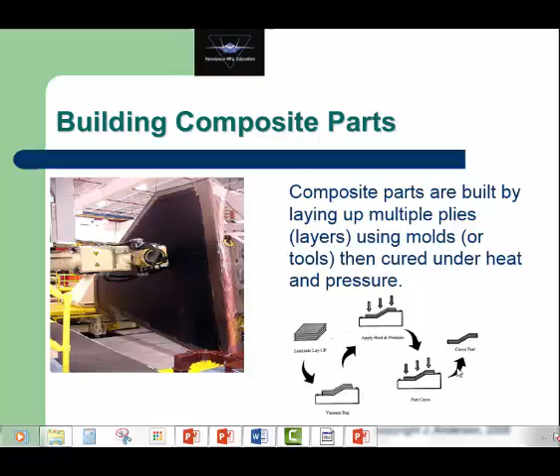So in some way we need to combine the fibers with the matrix, or actually put the matrix onto the fibers. And there are several ways that we could do this. First of all, we have to arrange the fibers, so usually we take a fabric and we cut it in the shape that we want, and we put it into a mold.

Now this mold that's shown here is a female mold. That is, the walls of the mold will define the exterior of the part itself. So the walls of the mold also define our surface quality. We'll lay the sheets of fiber or cloth into our mold, and then we'll somehow get the resin onto the fibers.

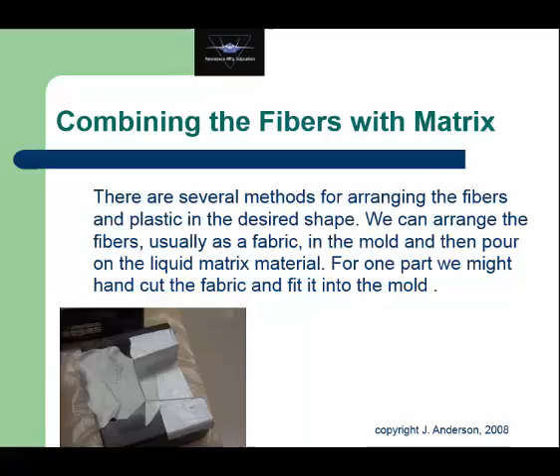So the first step in all this is to get our plies, or our layers of woven material, woven fibers, into the proper shape, the geometry that we need to fit in our mold. So if you're making one part, you could probably just hand cut the fabric, trim it so that it fits the mold well, and it's all good.

But if you're doing multiple parts, you want to conserve the material as much as possible. That is, you're making 100 parts, and so the material wastage becomes a factor there. You want to do something different.

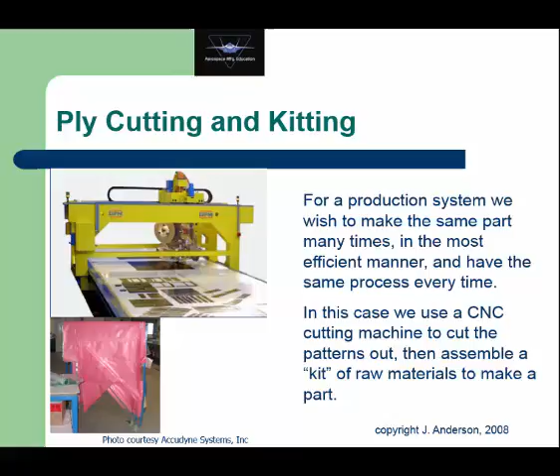One of the common ways that's done is with a CNC cutting machine. So we'll lay out a pattern on the CNC cutting machine, the computer numerical control cutting machine, that's the most efficient pattern that we can cut out of this width and length of cloth that we have. And then the machine automatically cuts that. Interestingly enough, this machine is also used in the garment industry to cut out patterns of cloth to make garments.

So the wet layup: basically, the wet layup process is we lay the fabric in the mold, we saturate the fabric with a mixed liquid resin. Most of these thermoset resins are two-part resins. That is, we mix two chemicals together, and that starts the chemical reaction. So once we mix them, we have an open time for the resin, because the reaction has already started. Over a period of time, this resin, the mixed two-part, will start to thicken and eventually harden.

So our challenge here is to mix the two parts of the resin and quickly go and saturate the fabric when we have a low viscosity liquid that will get into the pores in the fabric more easily, or wet out the fabric, as the terminology is.

So we work the resin into the fabric so that it conforms to the mold. We add another layer, another ply of fabric, and we repeat the process with the resin, and we continue until all the plies are in place, and we work the excess resin mechanically out to the edges, and the composite conforms to the mold. Right now I want to show you a video of actually this wetting out process.

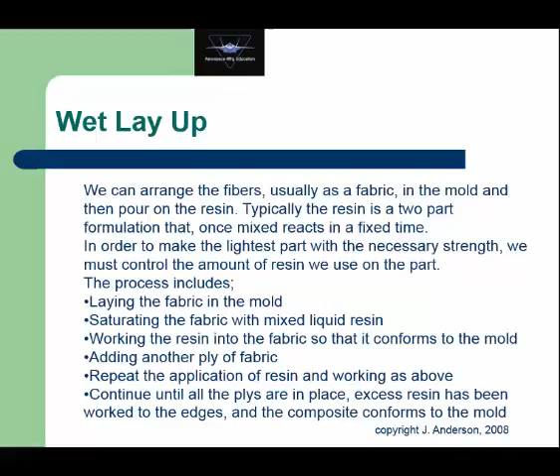It's about a 5-minute video, so let me turn that on. We'll take some of the fabrics and we'll just wet them out with epoxy, get a feel for the different fabric types, the difference between Kevlar, glass, and carbon, and we'll try to get a feel for how the different weave styles affect how well they wet out with epoxy.

And what we have is carbon uni, we've got some Kevlar woven and some glass woven, and some 1708 knitted glass, and some 1.5 ounce chop strand mat. So we'll do those, and then we'll wet out.

And this example here is a stack of 4 plies of each of those products, and then we're going to put a peel ply, which is the blue material, on top of those. Just squeegee out the fabric and put the peel ply on top, and try to consolidate just by hand, no vacuum pressure, but just by hand.

Consolidate the laminate, get all the air out, make a nice solid laminate of these fabrics. Part of the key to that is just to get a good wet kind of edge with the brush, ahead of the brush stroke there.

Really what you're trying to do with the brush is push the resin into the bundles. So you've got resin coming up and you've got resin going down. So I think the thing to notice here is that the cloth really wets out fast with epoxy. It's just, cloth and epoxy are made for each other.

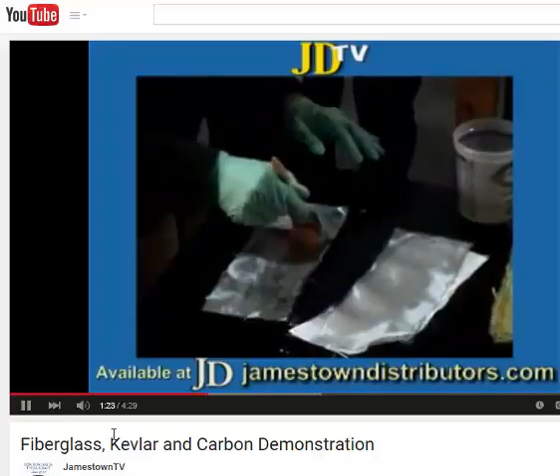And you know, you can see that this epoxy is cold, it's thick, which is really not the best situation, but even so, it just wets out beautifully. You can also see that the cloth is really hard to keep in line. It's a cloth, so it's woven, it's not stitched, it's not mechanically attached together.

It's just held together by the weave itself. And then when we're done with that last layer, we're just going to put a layer of the nylon peel ply. That's the blue material. That's just going to give us a nice, smooth surface on the top.

And whatever finish you have on the top of the peel ply, you will get on the top of the laminate. So it does, if you're concerned about that, it does benefit you to take some time just to squeegee out those little wrinkles. Will some of the amine blush go away? Yes.

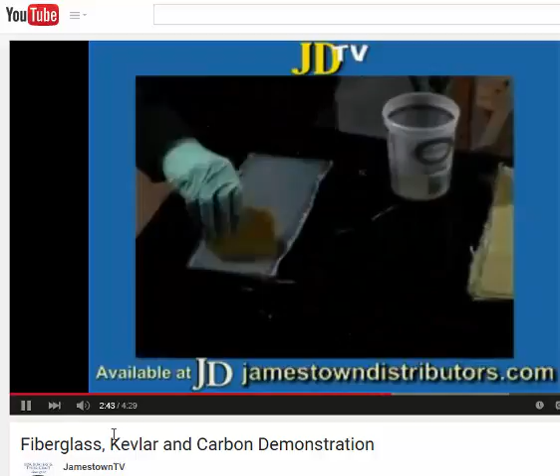Yes, there's a difference between wetting out glass and wetting out Kevlar. It's just harder, it's a lot more difficult to feel comfortable doing a good job. And that won't mechanically stand up when you get done, even with a peel ply.

It's a disaster, but you can peel that back and you can see that the combination of having the substrate, the table pre-wet, and ensuring that you've got a lot of resin there, that's how I feel comfortable knowing that you've got Kevlar properly wet out. Obviously, there's more resin than you need, but I'd rather be on the safe side with Kevlar.

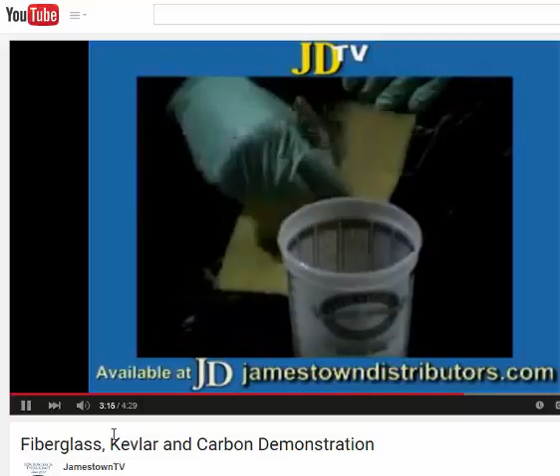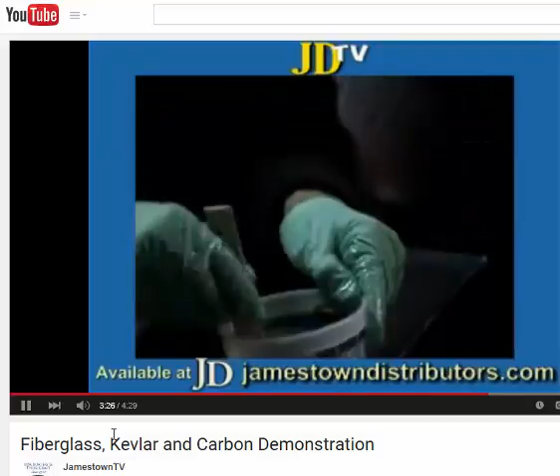This is actually an infusion resin that we have in the shop. It's very, very thin, as you can see, but it's a vinyl ester blend, infusion resin. It's a very nice resin.

Now, what we could do maybe at the same time is just take the epoxy and do this exact same thing I'm doing with the mat. Just wet that out and then do it side by side.

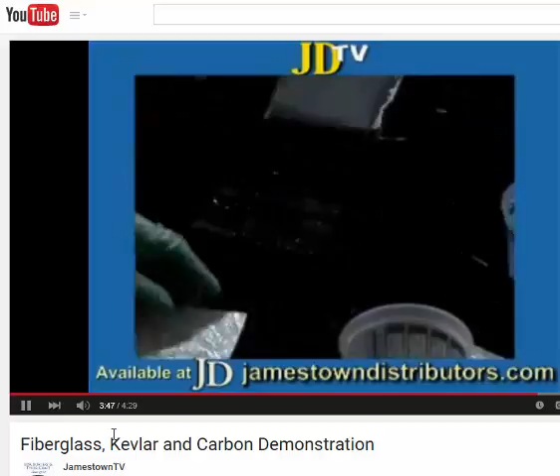You can see how the mat just really disappears with styrene-based resins. I mean, it's just really, really clear. The binder that's holding the mat together is designed to dissolve in styrene. And the problem is, or the good news is, that epoxy has no styrene in it.

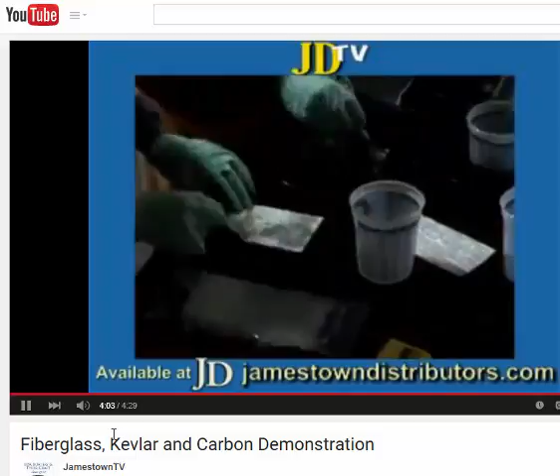So we put that on here, we're doing these side by side, and you'll really see how one just wets right out, and the other one doesn't. See, it looks like it's dry, but it's not. There's plenty of resin, it's just not breaking down the binder. Anyway, that's pretty much it, I think.

Typically, a male mold would be something that you lay up the fabric around, and then the interior of the part, the composite part, has the finished surface on it.

Wet layup is probably the simplest methodology, but the problem is you get a lot of wastage, and it's very hard to control how much resin you have in your finished product. For the highest performance parts, we'd like to have the minimum amount of matrix material necessary to hold the fibers in place. The resin has a much lower strength than the fiber, so we want most of the weight of our part to be fibers and a minimal amount of resin to hold it in place.

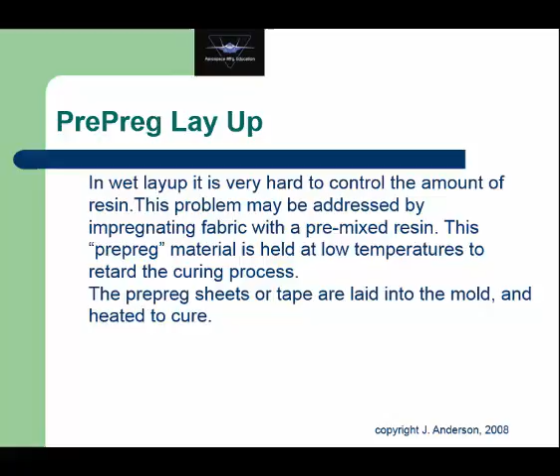So the next step in the process, once we get the fabric and resin into the mold, is to debulk or consolidate the part. I mentioned a vacuum bag before in the overall process—this is the vacuum bagging process.

On top of that, we have a porous release paper, which gives us a surface to press down on the part and also allows gases and resin to escape because of the porosity. Then we have a breather material, more porous, allowing gases and resin to escape. Then a barrier release, which is a seal, followed by a bleeder material that allows us to get rid of excess resin, and finally the vacuum bag itself.

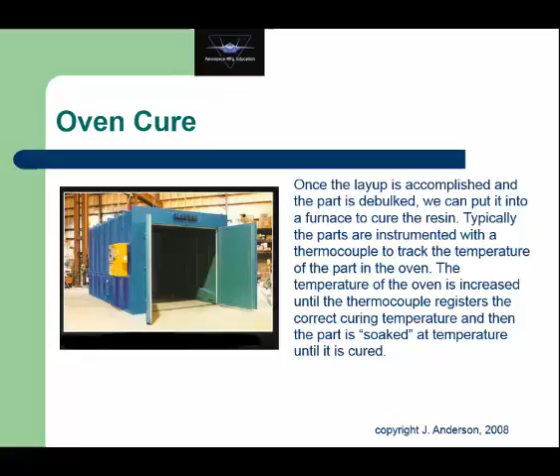So what's the next step up? Well, if we want really high performance parts, we need to be sure we've consolidated the parts well, then we need to go to an autoclave.

The autoclave is essentially a pressure vessel. It's been described as a big pipe bomb. We can increase pressure, say to 200 psi on the inside of this thing.

We have a vacuum bag also, so the vacuum bag pulls some pressure on the outside of the part, pushing it into the mold. Then we have an external positive pressure on top of the vacuum bag that increases the force pushing the fabric into the mold, pushing out any air or gas bubbles and excess resin.

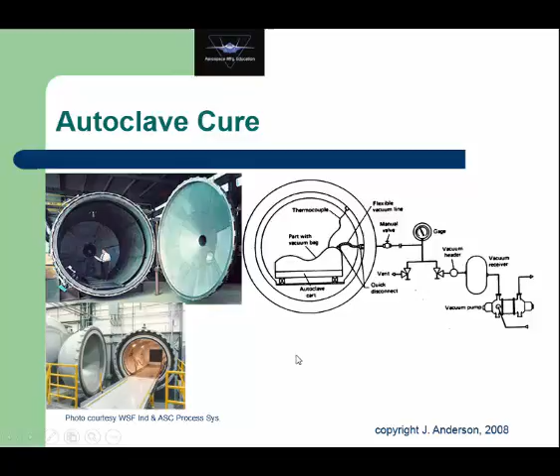This is an overall schematic of the plumbing in the autoclave. The smaller autoclave at the bottom is at the Cessna plant in Wichita, Kansas. This larger one is also in Wichita, but it was designed and manufactured specifically for making parts for the Boeing 787 fuselage, big parts.

This is a typical autoclave cycle. You can see we bring the temperature up in steps so we can get it up to, in this case, 350 degrees. It's fairly typical for an autoclave part. We also bring the pressure up, and here the external pressure is about 100 psi. This is the time cycle.

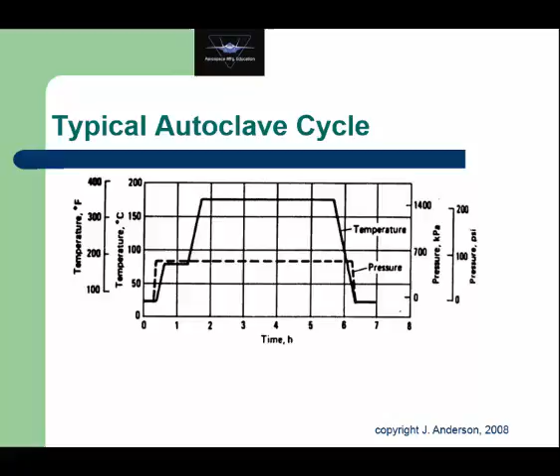It has to sit in the autoclave to cure. So you can see that when we make the part, we invest all this time and labor putting the part together, and then we spend 8 hours in the autoclave before we know if we've got a good part. So it's important that you control the process in making composite parts at every stage, because you're adding a lot of cost into the part as you go along.

This is a little different take, a spin-off on wet layup called the vacuum resin infusion process, and it's becoming very popular. The reason is it allows you some of the advantages of pre-preg without the expense and hassle of having to buy pre-impregnated materials and store them under refrigeration.

This allows you to lay the fibers, cloth or mat, into a mold, set up your vacuum bag, and instead of just pulling a vacuum to press the part into the mold, your vacuum bag also gives you a vehicle to pull resin. You have a resin reservoir and a hose going in from one side of your part, and on the other side a vacuum hose that goes out to a vacuum pump.

As you start pulling a vacuum, you pull this vacuum bag down onto the part, pressing it into the mold, and at the same time we suck resin up through the fabric underneath the vacuum bag and out the other side. So this is becoming popular with aerospace manufacturers because it cuts out some of the hassle involved in using a pre-preg.

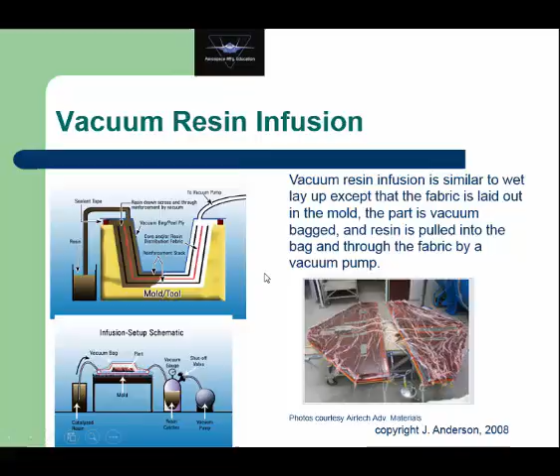Much like a tape dispenser for packaging tape, most everybody's seen those, where you have a roll and you pull it along and it lays the tape down. Well, this is an automated, more highly controlled version of that.

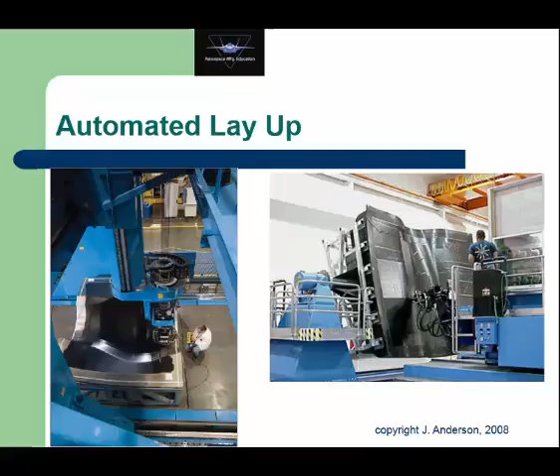So this is tow placement as opposed to tape placement. With tow placement, we typically have a mandrel, a male mold, tied into a device similar to a lathe so that it rotates the mandrel, and we lay the tow across the top of it. Remember, a tow is maybe 1,000 strands twisted together of carbon fiber. As we rotate the mandrel, we can move the orientation of our dispensing head and get a different angle of the fiber with respect to the long axis of the mandrel.

How do you keep the fiber in place when you lay it down? Well, the fiber, or the tow, is typically wetted with a small amount of resin that makes it tacky and holds it together. Once the part is made, you bag it all up and use vacuum infusion, wet layup, or whatever method to get the remainder of the resin in, then go through the curing process as we talked before.

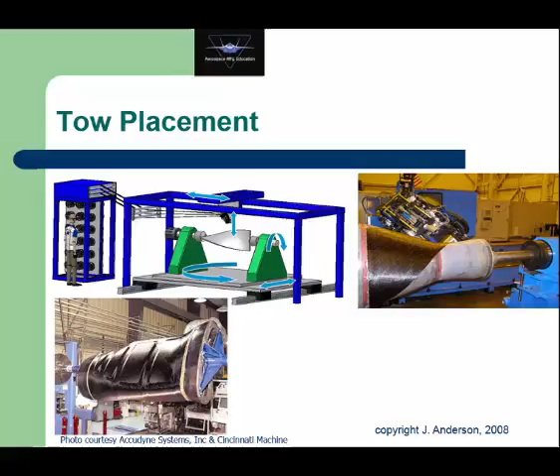I want to show you a video of some automated layup using, or building, the Boeing 787.

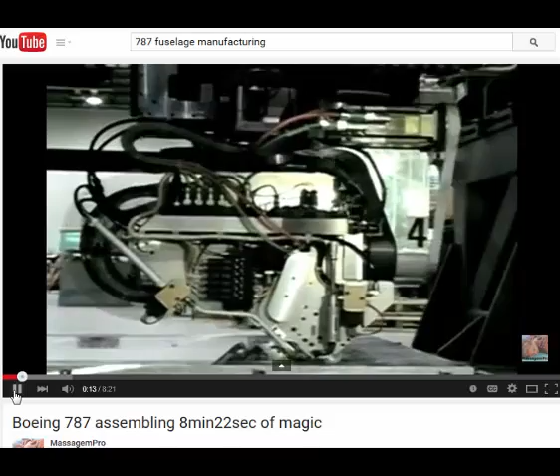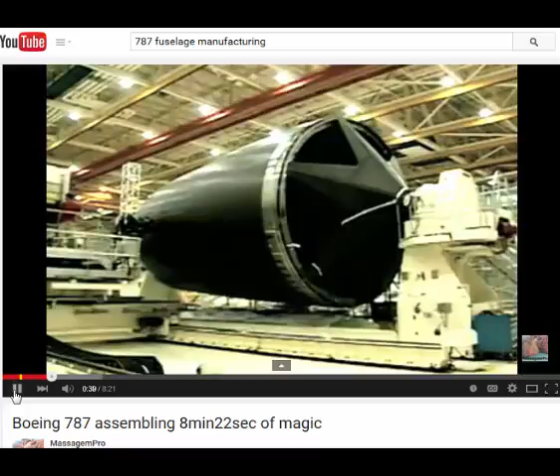The 787 will be built differently than any other airplane Boeing has ever built. Instead of being made from metal, it's made from carbon composites, and what we're seeing here are the heads of the machines that lay down the tape. Carbon tape comes in rolls like duct tape, rolled along a surface and laid flat. The carbon fiber is infused with epoxy resin, and this black material on top of this slab is what's being laid. When they're making a fuselage, they spin a barrel.

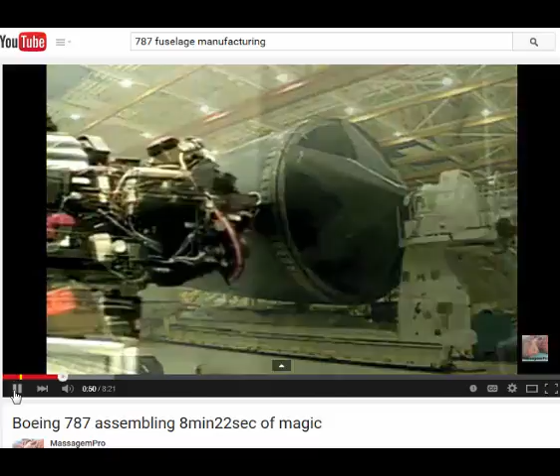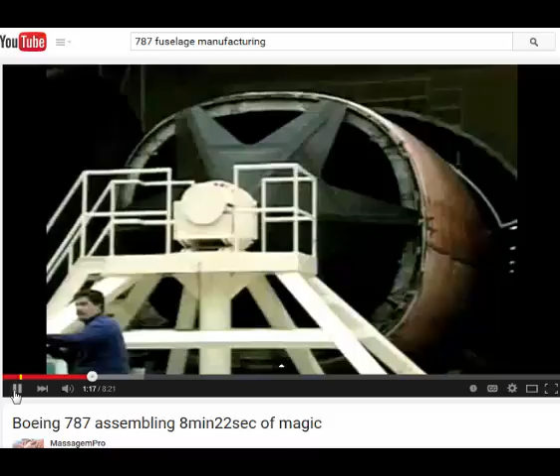This is called a mandrel. It's a cylindrical mold, and they lay the tape. There's the tape head machine again, laying the tape in layers one after the other as the mandrel spins and the fuselage takes shape. You can see it turning as the head works its way along. So they make layers of tape, and when they've got the shape ready, they put it in a giant oven. That's what this is. It's called an autoclave. They've had to build some of the biggest autoclaves in the world for the 787 project. The one in Wichita, for example, is 30 feet in diameter, 70 feet long. They take it out and it's baked hard.

The material is black when it's not painted, so you'll see airplanes no longer having the shiny, unpainted metal surface. Joining two of the fuselage pieces together, and there we have the beginning of a Dreamliner.

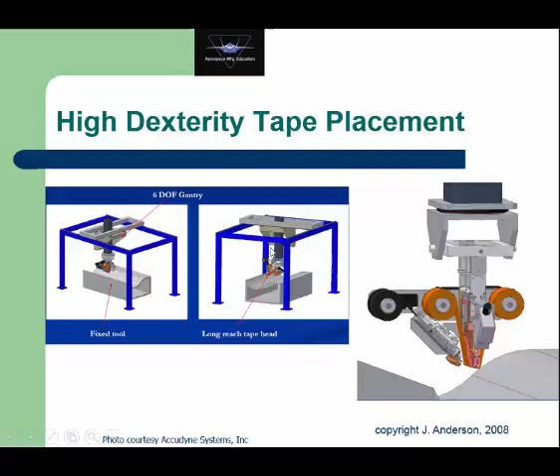So this is the high dexterity tape placement head. You saw some of that on the video we just looked at, and this is the end effector on that head. Again, it's a gantry-style robot with this head on the end of it.

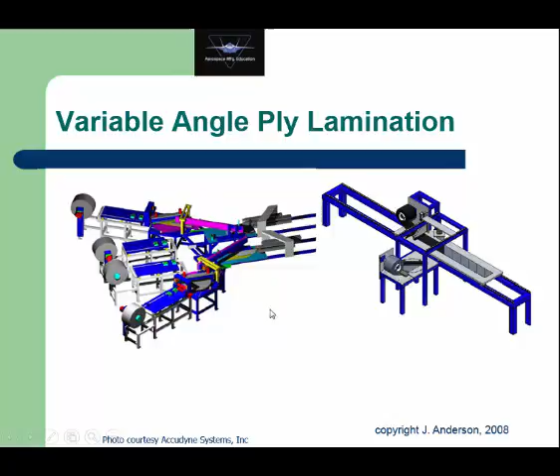We also have devices that can do variable angle ply lamination if we're laying up sheets for parts. We can lay in various angles automatically by arranging a set of conveyors so that it lays the tape or fabric down.

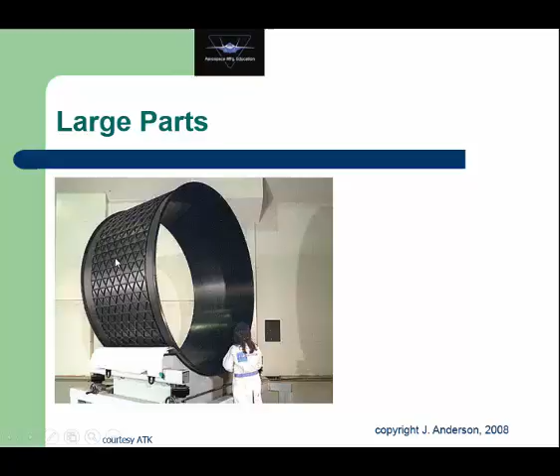Future directions for composites: more automation, and we're going to talk about that in some of the manufacturing material in modules 7 and 8.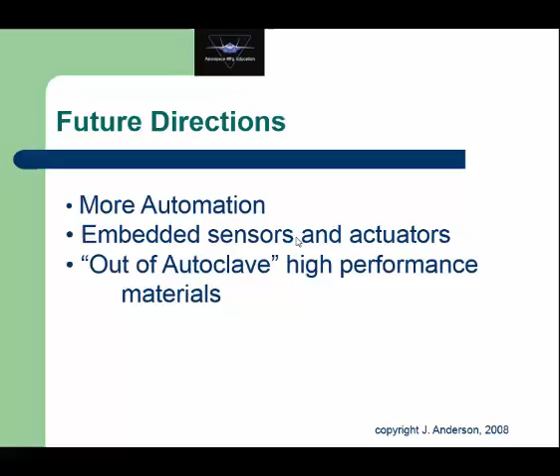Embedded sensors and actuators, we talked about that before. There's a couple of interesting wrinkles on this. We're actually embedding RFID tags inside composite aircraft parts now. This allows us to use the radio frequency identification tag to record manufacturing process parameters for that particular part number, and other interesting things that allow us to store and handle that part. We can also embed strain gauges to look at the stress history of that part, which allows us to plan out maintenance or replacement of parts.

Well, that wraps up our introduction to composites. From here, we're going to go into more detail on composites manufacturing in modules 7 and 8. Then in modules 9 and 10, we're going to talk about some ways you can actually have your students get hands-on with composite materials, some projects, if you will, and how you might do that. So anyway, that's it for today. Thanks.